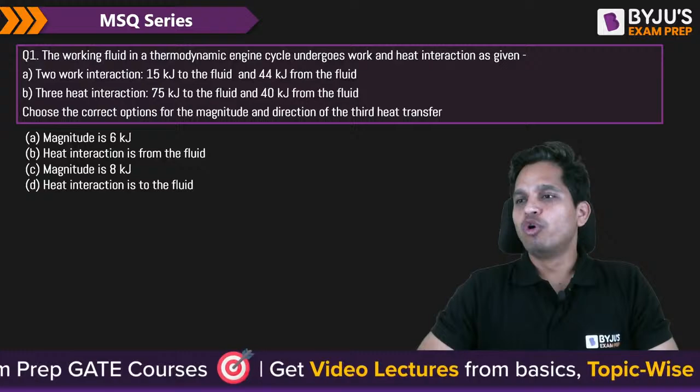So you have this cycle, and work and heat interaction is happening. So two work interactions: one is work input is equal to 15 kilojoule, and work output is 44. It is zoom only, right? It is the highest width. Maybe you can zoom it in your mobile or something, but it is in the whole PPT.

Now they are saying 3 heat interactions are happening, 2 are given. So first heat interaction, Q in, is equal to 75, and second, Q out, is equal to 40 kilojoule. Third one I don't know, I need to find out. So that is what I need to find out: magnitude and direction of heat interaction, Q3.

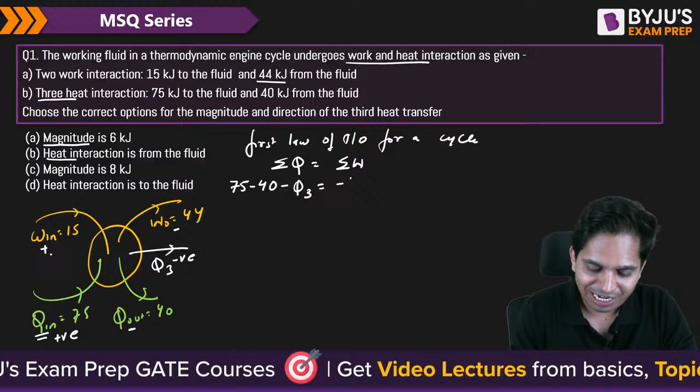Yes, it is from the fluid, Ashwin, you were wrong, okay. Chalo, let's see how it is getting. So Q in is positive, Q out is negative, this is also out, this will also be negative. Work in is positive, this will be negative. So it is 75 minus 40 minus Q3 is equal to... my work input is negative, I am sorry, input is negative, this is positive, so minus 15 plus 44. So Q3 is equal to 75 minus 40 plus 15 minus 44. So now how much are you getting? How much will you get?

75 minus 40 plus 15 minus 44, so you are getting plus 6 kilojoule. Now here what does plus mean? Plus does not mean that it is transferred to fluid. What does it mean? It means that you have assumed the correct dimension. Because already minus we have given here, already minus we have put here. So now if it is coming positive, we have already considered a direction. So if we are getting positive, it means that we have considered the right direction. So that is correct. Magnitude is 6 and from the fluid.

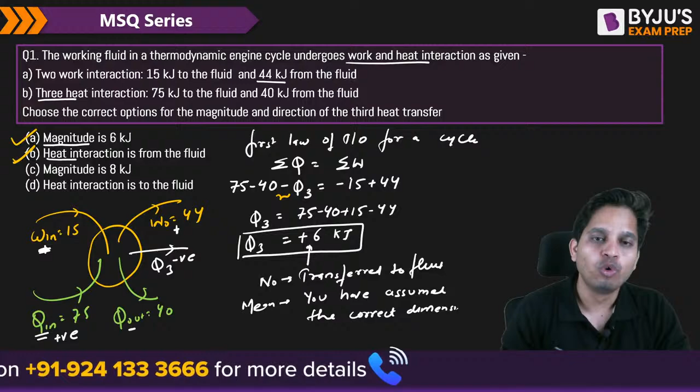Okay, chalo. Next question, quickly. Very simple question.

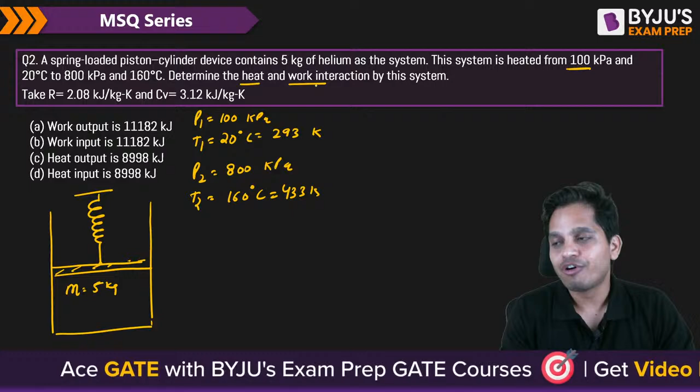I think you have already seen this question. A spring-loaded piston cylinder device contains 5 kg of helium. So we have this cylinder, which has piston, and a spring is attached. It contains 5 kg of helium. Now the system is heated from this pressure. So P1 is equals to how much? 100 kilopascal, P1 is 100 kilopascal and T1 is 20 degrees Celsius, which means 293 Kelvin. And then P2 is equals to 800 kilopascal and T2 is equals to 160 degrees Celsius. So 160 is how much? 160 is 433 Kelvin. Determine the heat and work interaction. Both we need to find out, heat and work. Yes? Ashwin, are you solving this?

Now you see, if I draw PV diagram, I need volume as well. Okay, what I can do, I can find out volume from here. V1 is equals to mRT1 upon P1. So M is known, R is known. It is what? It is helium. So R is given, T1 is given, P1 is given. Okay, so 2 into 2.08 into 293 by 100. How much is volume? How much is volume? V1. Quickly, how much is V1, guys?

V2 also you can calculate. M R T2 by P2, that is 433 upon 800. How much is V1 and V2? Quickly, how much is P1 and V1 and V2? Come on, quickly. V1 is? Are you solving this or not? Yes or no? I mean, if you are solving it, then I should stop. Otherwise, I will write the answer. So V1 you are going to get how much? 30.47 meter cube and this is

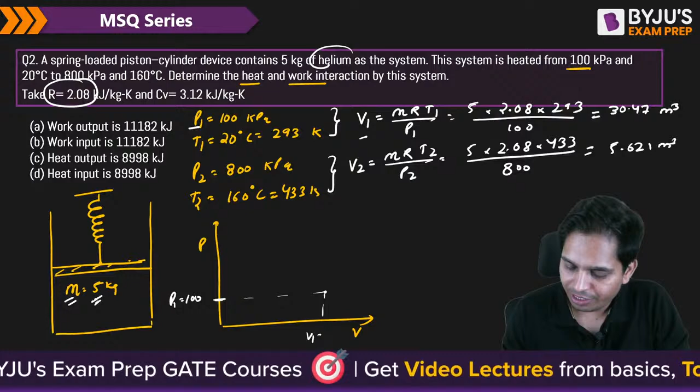Chalo. Now what do we know? Look, P1 we know, V1 we know. So I can mark P1 100 and V1 30. P1 is equals to 100, V1 is equals to 30.5 meter cube. Also I can write P2 is equals to 800 and this is 5.

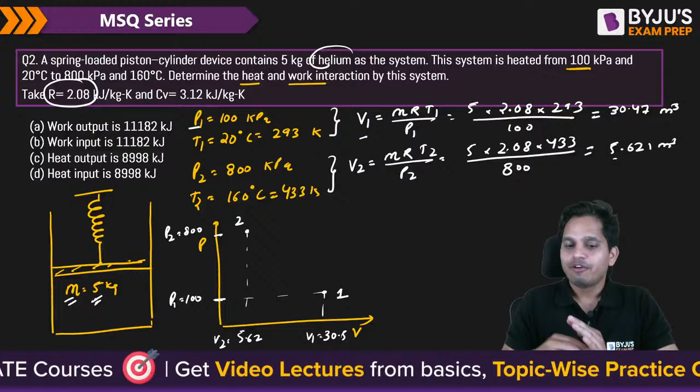Now you see, I know point 1, I know point 2, and if I know the process, I know that area under the curve gives us work transfer. So what kind of process will be there? Quickly guys, what kind of process? It is when there is spring, there is always linear relationship. No, it is piston cylinder, right? It is not open. It is closed. But what kind of process is happening? Whenever you see, because it will only allow to go up very slowly. So it is a linear relationship.

So basically, spring is, whenever spring is there, you can draw this diagram between 1 and 2. Okay, so you are going like this. So if this is my curve, why am I drawing this curve? Because of spring, linear relationship between pressure and volume. So pressure is equals to AV plus B. Some kind of relationship is there. Okay, why this linear? Because of spring.

Okay, so now I have drawn this process and I know that area under this curve will give me work interaction. This is work transfer, dW. So now you can calculate dW for this area, for this whole area, is how much? Half P1 plus P2 into V2 minus V1. So half, or basically final minus initial, okay. Final is 2, initial is 1. Now P1 is 100, P2 is 800. So total is 900. Now V2 was 5.6 something and this is 30 point something. This is 5.6 to 30.47. So tell me how much work you are getting. How much work you are getting?

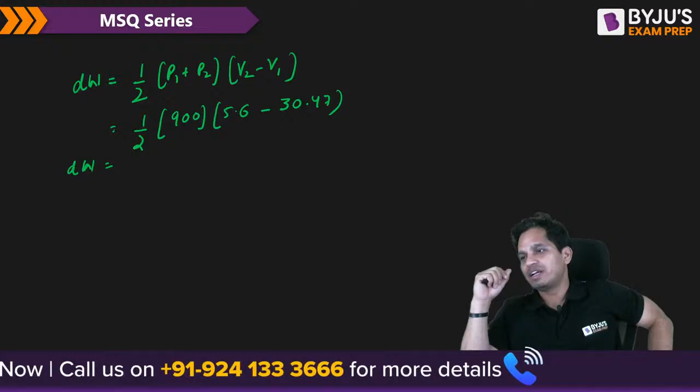Sadi Carnot, I am not the right person to answer this. Okay, soil mechanics is, I think, civil subject, right? So it's better if you ask a civil faculty, he will be able to advise you better. If you want answer, you can ask something from mechanical engineering branches. I can answer that, okay. But as I can see, that is civil engineering, right? Soil mechanics is from civil, isn't it?

Chalo. dW you have gotten 112. How do you get this? You will get minus 11182. 11182 basically.

Kilojoule. Are you getting this? Are you also getting this or not?

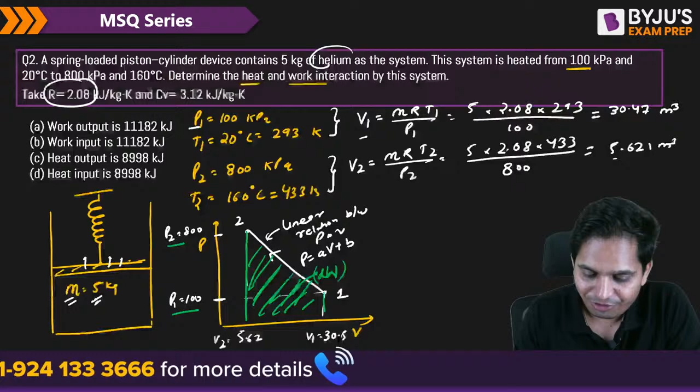Now they are asking calculate heat transfer as well. So dQ for a closed system equals du plus dW, and du is M CV T2 minus T1 minus 11182. Mass is 5, CV is given as 3.12. T2 is how much? T2 is 433, T1 is 293. So 433 minus 293 minus this. How much are you getting?

Now what is the heat transfer? Minus 8998 kilojoule.

So you are giving it is work input and this is heat out. Heat out, heat out. Okay? Clear? Good? Did you get it?

Guys, come on, whoever is there, try to solve it with me, because when will you solve? Tell me, when will you get extra time to solve it? Nowhere. If you're just sitting down and watching this lecture, then you are doing a mistake. You are anyway giving that much time, right? So solve before me, give the answer. If you are hesitating, writing your answer in the comment, online is the best way to come out. So for example, if there is a physical class, maybe sometimes you feel embarrassed, I have done wrong, maybe I have done wrong, I should not answer. But what is the hesitation in answering here? You can directly answer in the comment box. Nobody knows you. You are just growing yourself by solving questions, and by writing it, you have a sense of satisfaction inside. Trust me, when you answer it, you have a sense of satisfaction inside. Okay, chalo. So yes, that is correct, that is correct.

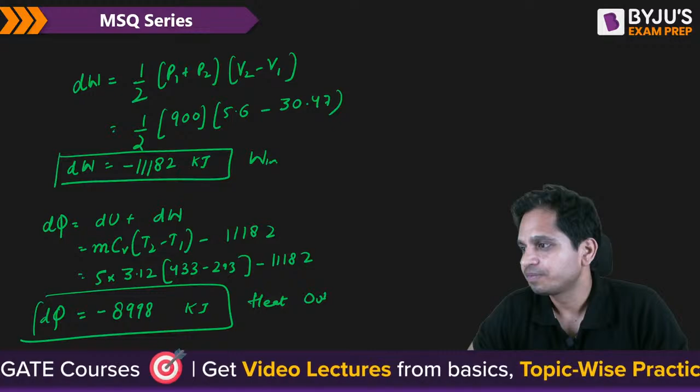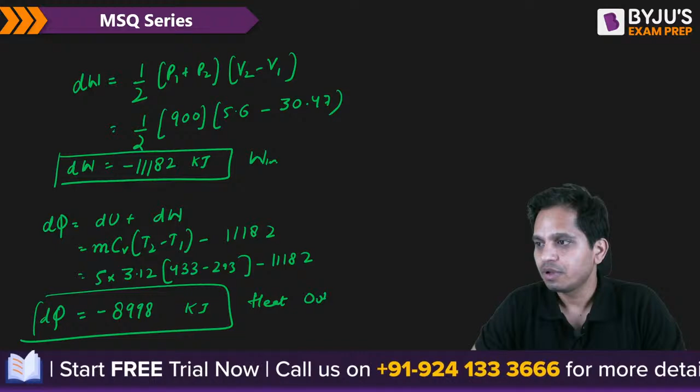Solid mechanics. Okay, solid mechanics you said. I read it, soil mechanics. Okay, so MS in solid mechanics or applied mechanics. Applied mechanics is also Madras. So what you can do, I'll tell you the best thing. If you are in the Telegram group which I shared in the beginning, you can connect with me. You can directly text me, and I will connect you with one person who is in IIT Madras. He knows much better about placements, he knows much better about the actual status of the branches. So I think applied mechanics is better in MS. He is in aerospace basically, but he knows better, because when I was in IIT Kharagpur, I knew what are the placements of other branches as well. And he has done BTech in mechanical, so he knows about these things. He can give you a better idea, but I think applied mechanics is better. But in terms of placement, I am not very sure. That is my perception. Okay, chalo.

Let's move on to the third question. Again, very easy question, guys. Quickly, what do I need to find out? Net work transfer for the cycle and net heat transfer for process 1 to 2. I have to check which options are correct. So basically, I have a cycle in which 3 processes are happening.

Pressure, volume. Process 1 to 2 is constant pressure. So 1 to 2 is constant pressure, P1 equals P2 equals 1.4 bar, and V1 is given as 0.028. I don't know V2, but what I know is work output is happening, 10.5 kilojoule.

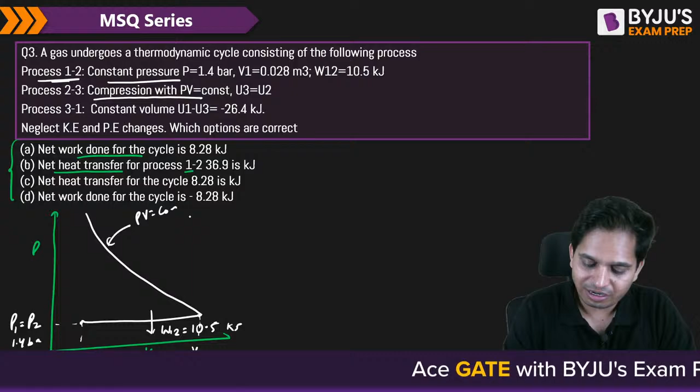Then 3 to 1 is constant volume, that means V1 equals V3. And they are saying that here U1 minus U3 is equals to minus 26.4 kilojoule. This is given. So what can you do? Now let us take

process 1 to 2. Now they have given work transfer equals 10.5, work 1 to 2 is equals to 10.5 kilojoule. And what is the work in constant pressure process? How do you calculate work in constant pressure process, guys? What is the formula to calculate constant pressure process work transfer?

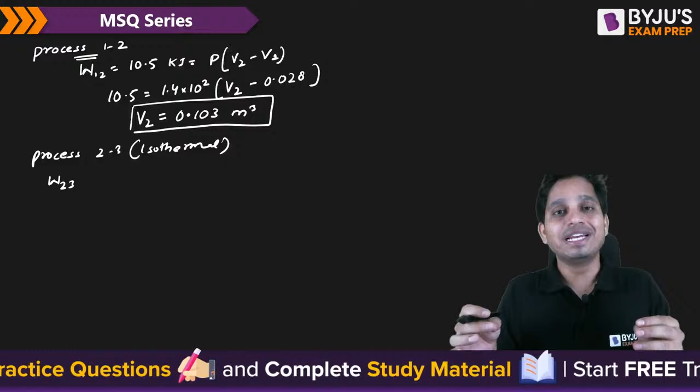Okay, so how do you calculate work? Guys, really look, if you are not writing, that is also okay. But if you do not remember these formulas, then it is time that you revise your formulas. I am telling you seriously, 6 months are left for GATE. You need to revise your formulas. It is very important, and you should have a revision cycle. You do not just revise today and forget it for 2 months. There must be a revision cycle. So if you are learning a concept today, revise it in 1 or 2 days, then revise it within a week, then revise it within a month. So you need to have a revision cycle.

Okay, so what is work transfer in isothermal? By P2V2 minus P3V3 upon... no, that is not for isothermal. I am really sorry, this is polytropic. So this is P2 V2 ln of V2 by... no, V3 by V2. Now you know V3, yes you know V3, you know V2 also. And you know P2V2 as well. So you know P2V2, you know V3 and V2. You can directly put it, yes, you can directly put it.

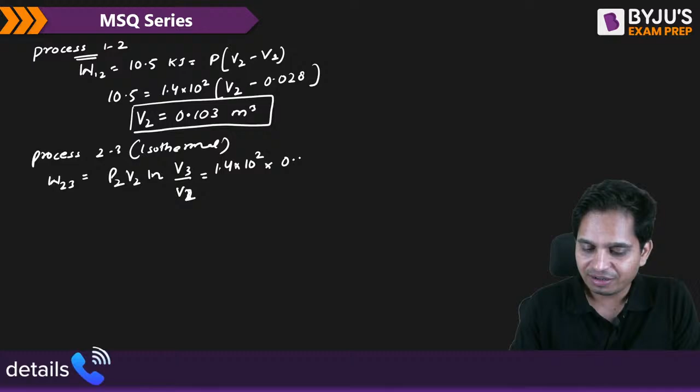Quickly guys, P2 is how much? P1 equals P2, so it is 1.4 into 10 to the power 2. V2 is how much? We have just calculated. ln V3 equals V1, 0.028. This is 0.103. How much are you getting for 2 to 3 work transfer? How much work transfer are you getting? Come on.

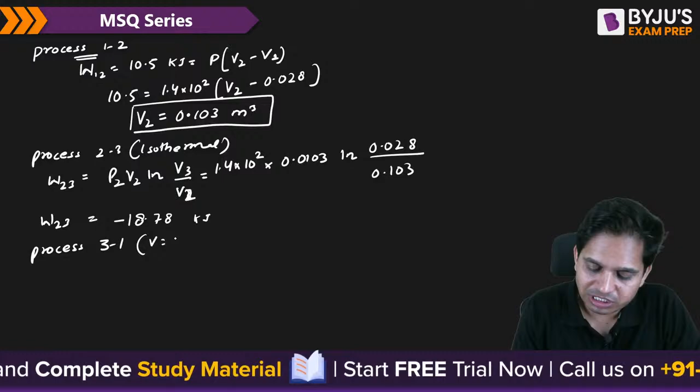Okay, chalo, so now next is process 3 to 1, which is constant volume. And what is the work for constant volume, guys? You should know this, this is the must know thing if you are studying thermodynamics.

Work 3 to 1 is equals to how much? Constant volume work, constant volume work, constant volume work. Na baba, na Siraj, that is open system work. Closed system work is always PdV. Now because volume is constant, so dV is 0. So constant volume work is 0. This is the most basic thing we should know. Yes, PdV is there, but it is 0 because change in volume will be 0. Volume is constant, change in volume is 0.

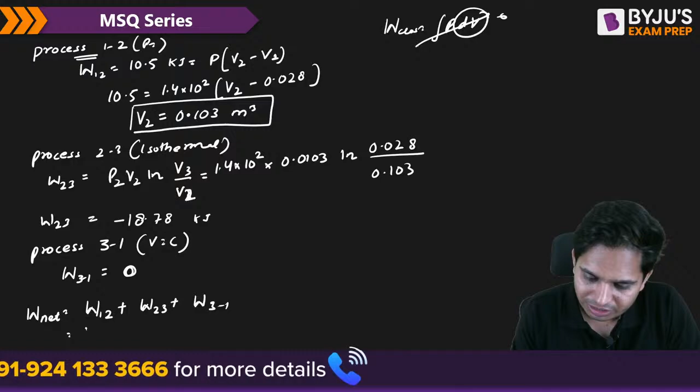Okay, so what is the net work? W12 plus W23 plus W31. So this is 10.5 minus 18.78 plus 0. How much is net work? Net work is minus 8.28 kilojoule. This is net work.

So let's see what the options are asking. Net work for the cycle is this. Is it correct? Is it correct? Or D is correct? Which one is correct? A or D, which one is correct? D is correct. Yeah, I mean approximately minus 7 is also okay, approximately 8 point something you are getting. Okay.

Now what about heat transfer? Heat transfer I need to find out.

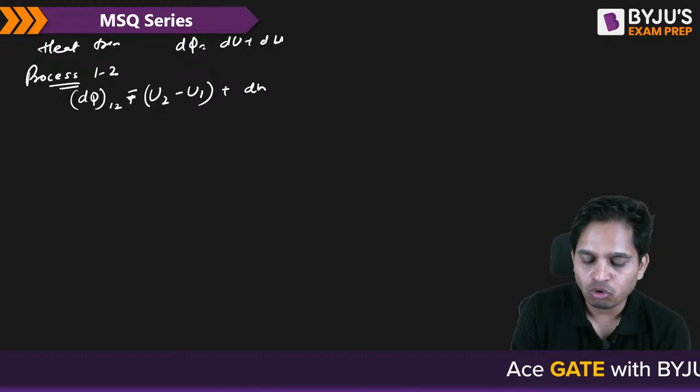So when I talk about heat transfer, I will use dQ equals dU plus dW. Yes, D is correct. So when I say process 1 to 2, that means dQ 1-2 is equals to u2 minus u1 plus dW 1-2.

Now how do I calculate u2 minus u1? They have given u1 minus u3 is this, and this is also given: u3 equals u2. So can I write u1 minus u2 equals this? Can I write u2 minus u1 equals 26.4 kilojoule? Yes, I can write that.

So dQ for 1 to 2 equals 26.4, and work is already given. This is work, 26.4 plus 10.5. So dQ of 1 to 2 equals around 37, around 36.9 kilojoule.

What about process 2 to 3? Again dQ 2-3 equals u3 minus u2 plus dW 2-3. Now u3 equals u2, it's an isothermal process. So yes, that is correct. 36.9 is correct. That means this is 0.

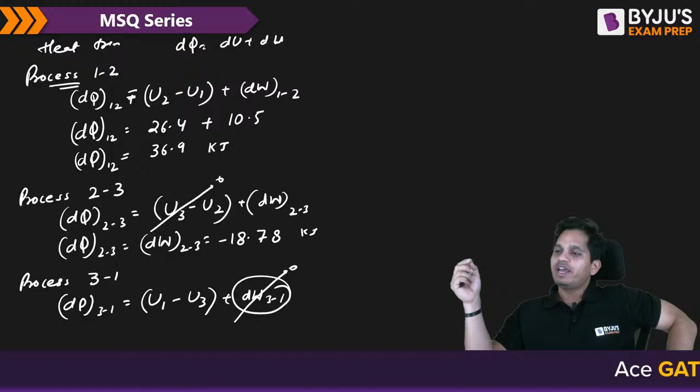Always give me a short name, I can't say the whole name again and again. But always write with sign, because you need to have this habit of writing sign. Otherwise, most of the time you will get your question answer wrong even if you solved it correctly, but while marking you will mark it wrong.

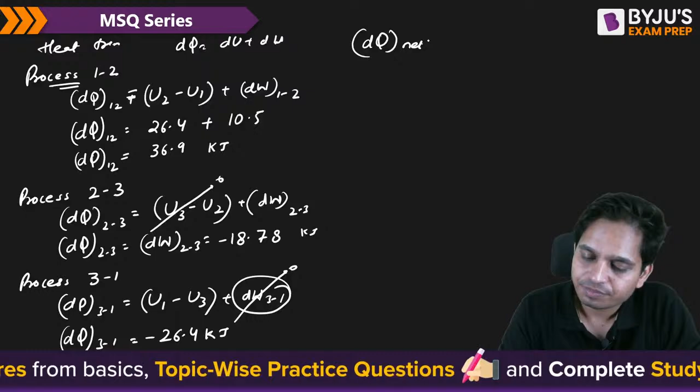So dQ 3 to 1 equals u1 minus u3. So what is u1 minus u3? This is minus 26.4 kilojoule. So what is dQ net? dQ 1-2 plus dQ 2-3 plus dQ 3-1: 36.9 minus 18.78 minus 26.4. How much is it? Minus 8.28 kilojoule, Q net.

Okay, so let's see the options. Tell me which options are correct. D is correct, I know. A is wrong, I know. What about B and C? Which one is correct, B or C, or both? It is multiple select, more than one option can be correct.

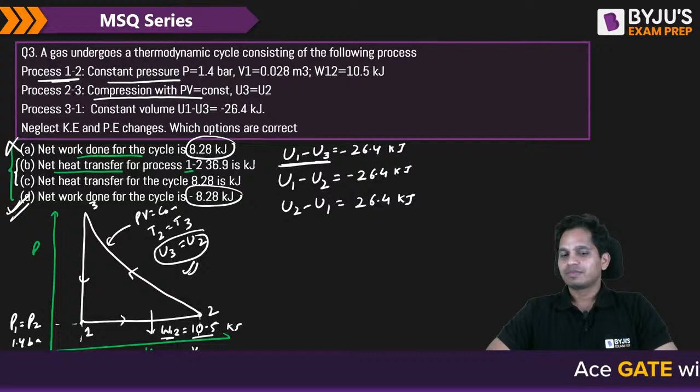Give me the option, which option is correct? C is correct, and you have got your question wrong. Net heat transfer, where is the minus? In the option, have they given you minus? Carefully see the question, carefully see the option. C is not correct, B is correct.

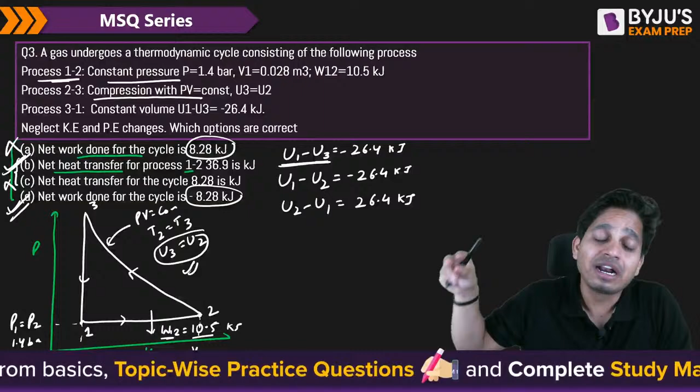Next question. A piston cylinder device initially contains M1 equals 0.6 kg of air with volume 0.1 meter cube.

Don't be scared. Whatever fear you have, however scared you are, you need to get up in the morning. You need to plan your next day at night, get up in the morning and follow that plan. Solve questions, keep going. If you are scared, it's okay, everyone is scared. But if you stop, then your fear will become your reality. So you do not have to stop. Maybe you will not get successful, maybe you will not get a good rank, but I guarantee you one thing: if you stop today, then for sure you will not get a good rank. If you keep going, there is a possibility maybe you will get a good rank, but if you stop, there is not a chance.

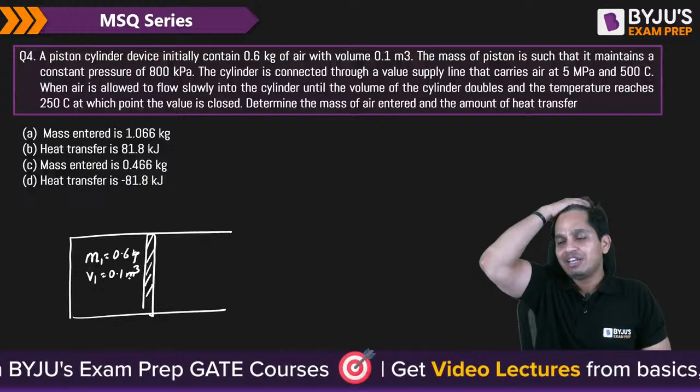This is an unusual request I have gotten, I have never gotten this request because the same proportion is there every time. But I don't know, maybe you are seeing it on a mobile screen or something. I think it's the same thing I always use, but I will see what we can do about this.

Anyway, so breathe. You don't have to stop. You have to promise that to yourself. Never stop.

Because anyway, even if you give everything for 5-6 months but don't achieve anything, you will not lose anything. I know in the next 5 months you are not going to achieve anything big anyway. But if you give these 5 months, maybe there is a 1% chance you will be able to do something. If you stop today, whatever you want to do after stopping, you can do after February as well. But right now, do not.

Whatever fear is there, fear is normal, but don't let that fear stop you. Get up in the morning, go ahead with your preparation. That is all you have to do, motivate yourself every day. Motivation comes, it's not natural, you have to motivate yourself. Whoever says it comes naturally, I would not say they are wrong, but it is not true entirely. Okay, chalo.

The mass of piston is such that it maintains constant pressure. Pressure P1 is equals to P2 is equals to 800 kilopascal.

Now the system is connected to a valve, where supply is P in equals to 5. This is the unsteady flow question. Ti is equals to 500 degrees Celsius. Volume of the air doubles when air flows in, volume becomes V2, so it expands and volume becomes 0.2 meter cube, and temperature T2 reaches 250 degrees Celsius. I need to find out the mass of the air entered.

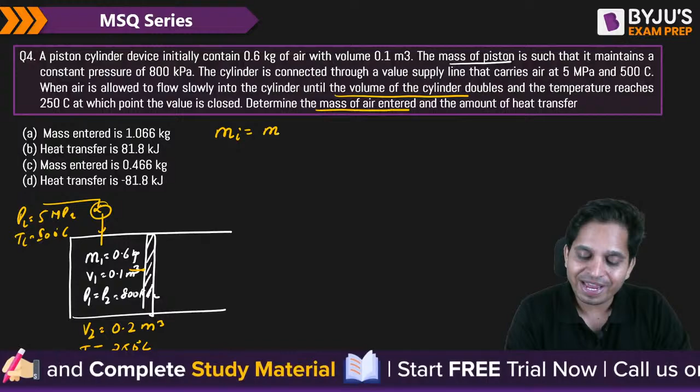So mass of the air entered will be equal to final mass minus initial mass, M1. M1 I know. Am I able to find out M2? So M2 will be equal to...

P2V2 upon RT2. So P2 is how much? Same, 800. V2 is how much? 0.2. R is 0.285. T2 is 250 plus 273, which is 523. How much is M2? Tell me.

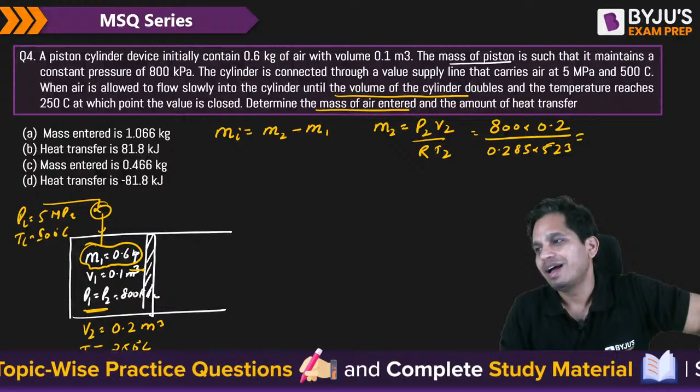So this is just 6 months hard work, beta. I mean, you can live your life whenever you want, but this hard work is always hard. That is why it is called hard work. It is only for 6 months. Adjust, do whatever you can.

So what is M2? M2 is how much? 1.066 kg. So Mi is equals to 1.066 minus 0.6. M1 is 0.6, so that much mass has entered.

So how much is it? It is 0.466 kg, so mass entered is this. What about heat transfer? Not just 1.066 — always try to write your answer till 2 decimal places, at least 2 decimal places.

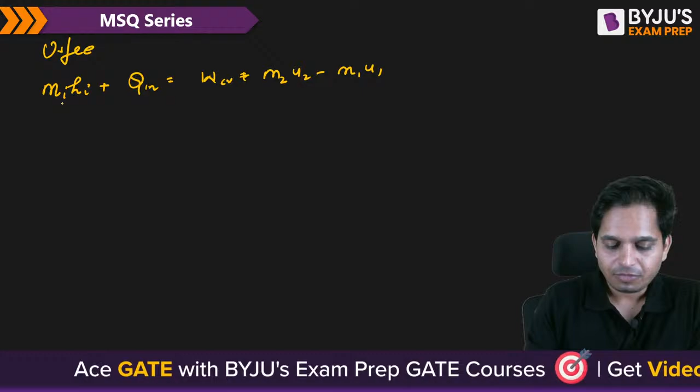Yes, now I need to find out heat transfer as well. So for that I can use the unsteady flow energy equation: Mi Hi plus Q in is equals to control volume work plus M2U2 minus M1U1. What is Mi? M inlet is 0.46 into Cp.

1.005 into Ti. So Ti is how much? It is 500 degrees Celsius. 500 means what? 773, right? So 773 plus this I need to calculate.

Control volume work means constant pressure work. Pressure remains constant, so P into (V2 minus V1). Pressure is how much? 800. It is 0.2, 0.1. M2 is, just now we have calculated, 1.066, 0.718, and T2 is 523, minus this is 0.6.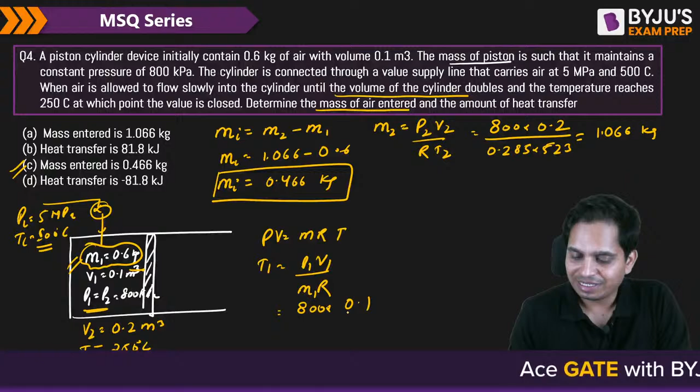0.718. What about T2? What about T1? Sorry, T1. I don't know T1, I can find out. How? By PV equals MRT, so T1 is equals to P1V1 upon M1R. P1 is 800, V1 is this, M1 is 0.6, R is 0.285. What is T1? T1 is 464.5.

So you can put it here, 464.5. So the only unknown is this Q in. You can find out how much Q in you are getting.

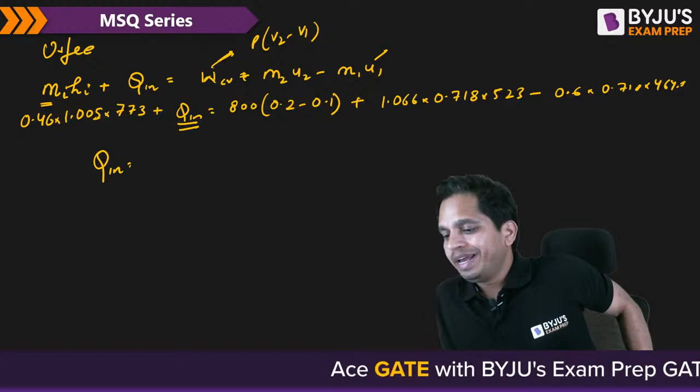Q in. Come on guys, how much Q in? No, Preet, what is that? 0.5455, no, Q in is not that. That is Mi, that is Mi, that is true. Okay, so write what you are answering. So what is Q in? Are you calculating, guys? Tell me quickly, what is Q in.

Did you calculate? So Q in is... come on Mani, Preet, come on guys, whatever is there, be a part of the class, okay, be a part of the class, come on.

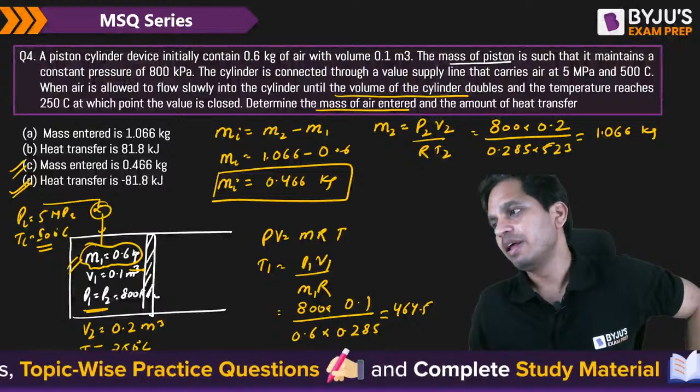It is minus 81.8 kilojoule. That means heat is rejected. Heat is rejected. So mass transfer is minus, heat transfer is minus 81.8. Minus 81.8. Yeah, 80.8 is also correct.

Okay, 81.8 is the correct answer. Basically, maybe some calculation mistake you have done, but you are very close. You are very close, okay. Let's move on to the next question.

A Carnot heat pump working between 5 degrees Celsius. So 5 is how much? 278 Kelvin, and 60, so 60 is I think 433. And it is driven by a Carnot heat engine. So it is driven by a Carnot heat engine.

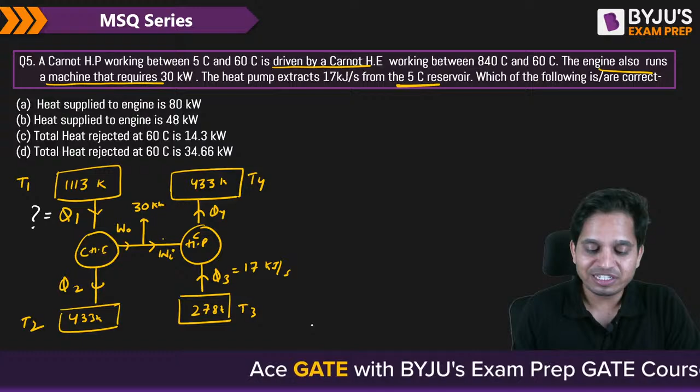Total heat rejected. So at 60, this is also 60, this is also 60. So I need to find out Q2 plus Q4. These are the two things I need to find out. Yes? These are the two things I need to find out. Okay, so how can we start?

You see, both of these are Carnot. So what I can do is: efficiency of reversible heat engine equals 1 minus T2 by T1, equals work maximum by Q1. Okay, let me say work output here. Work output. So this is 1 minus 433 upon 1113 equals work output upon Q1.

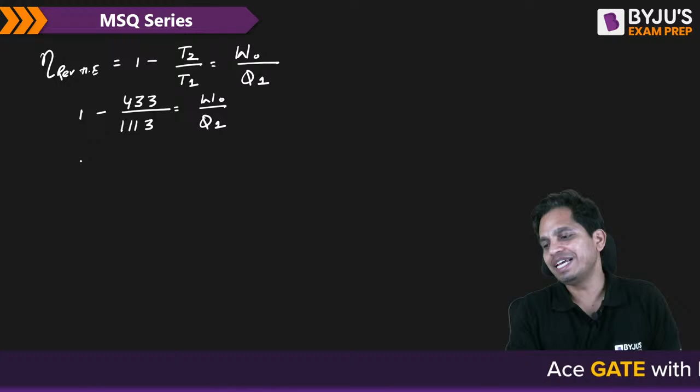So how much is efficiency? It is 0.7... no, I think, okay my mistake, this is 333. Okay, so this will be 333. So this is 0.7 equals work output by Q1.

So work output equals 0.7 Q1. Okay, because both are unknown, now I can't move forward, so I need to do something else. What can I do? I can go to this. Okay, yes.

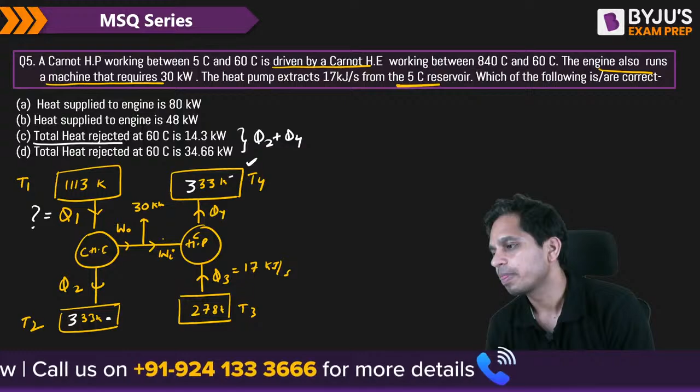So COP of reversible heat pump equals T higher, or T4 let us say, T4 upon T4 minus T3, equals Q4 by work input. Yes. Now what is Q4? So you can say by this energy balance that Q3 equals Q4 plus W in. So Q4 equals Q3 minus W in.

So I can write T4 is 333, by 333 minus 278, equals Q3 minus Wi by Wi. Now how much is Q3? Q3 is 17. Yes? 17 is given, yes?

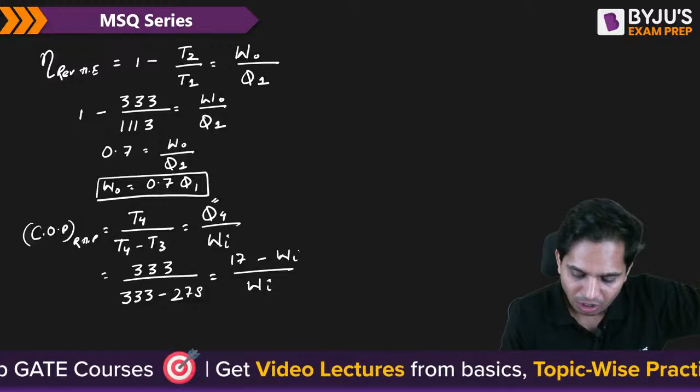So now the only unknown will be Wi, so you can calculate Wi from here. How much is Wi? What is Wi? Wi is this, okay, so how much is Wi? Wi is 3.36 kilojoule, right? Now from here I know that W out equals 30 plus W in.

W in I have just calculated, 3.36. So W output equals 33.36 kilojoule. Okay, 33.36. So now I know W output, I can put W output here, and I can calculate Q1 equals 33.36 by 0.7, and Q1 you will get 47.66 kilowatt. Yes, 33 is correct.

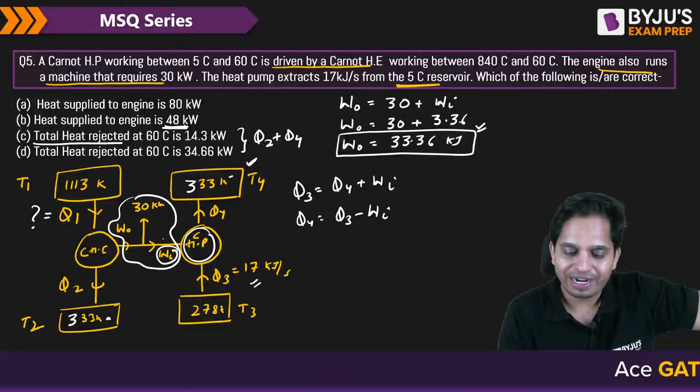Very good. So the first thing they were asking, Q1, so heat supplied is around 48, around 48. Yes, we got 47.66, that means B is correct. B is correct. Now total heat, that means Q2 and Q4 I need to calculate.

Q2 and Q4 I need to calculate. So Q4, I can calculate here itself by Q4 equals 17 minus 3.36 by this, which is W in, right? So Q4 equals how much? By 17 minus 3.36, it is 13.64 kilojoule. Yes?

What about Q2? By now I know this, Q1 equals 48. I know W output as well. So I can calculate, I know Q1 equals W output plus Q2. So Q2 equals Q1 minus W output. So 48 minus 33.36.

So Q2 is how much? 14.3 kilowatt. So now I can calculate Q2 plus Q4 equals 14.3 plus 13.64. The answer is 34.66 kilowatt. Yes?

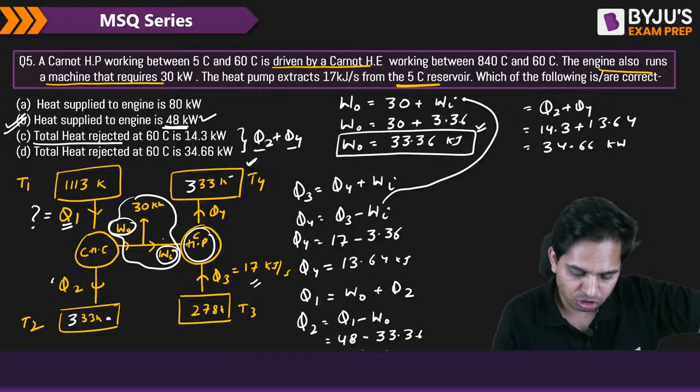Okay, Q4 is basically... one second, this was wrong. By energy balance, energy in will be equal to energy out. So Q4 is going out, it will be equal to Wi plus Q3. So the same thing you are going to write: 17 plus Wi. I am sorry, that was by fault.

So now work input is 3.36 plus Q3 is 17, so it will be 20.36. So this is 20 point...

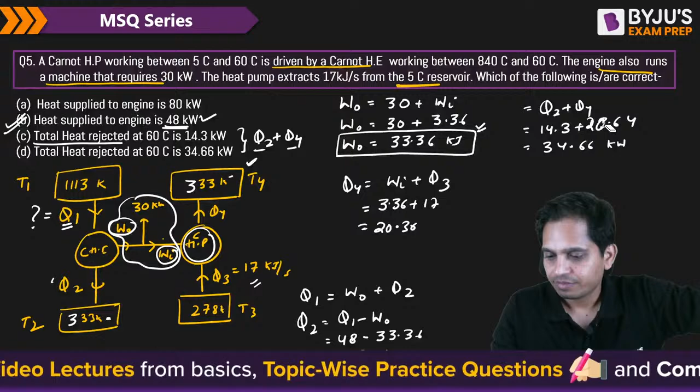20.36. Now you will get D. Okay, good.

Chalo, let's move on to the next question. Very simple question. A heat engine working between... so now I have a heat engine. These type of questions are frequently asked. It is working between 1000 Kelvin and 300 Kelvin.

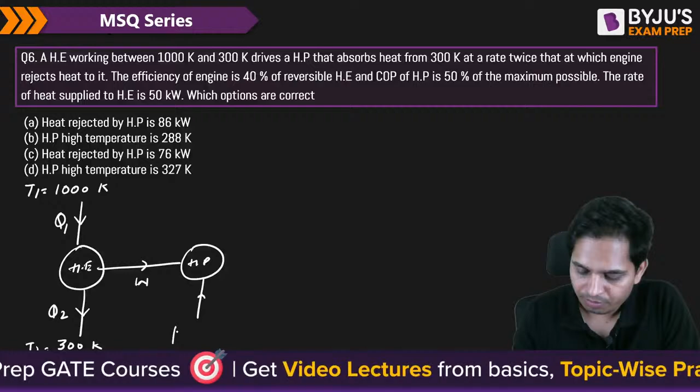Now it is driving a heat pump that absorbs heat from T3 equals to 300 Kelvin at the rate twice at which engine rejects heat to it. So Q3 is equals to 2 times Q2. The efficiency of engine is equals to 0.4 times reversible, and COP of heat pump is equals to 50% of reversible heat pump.

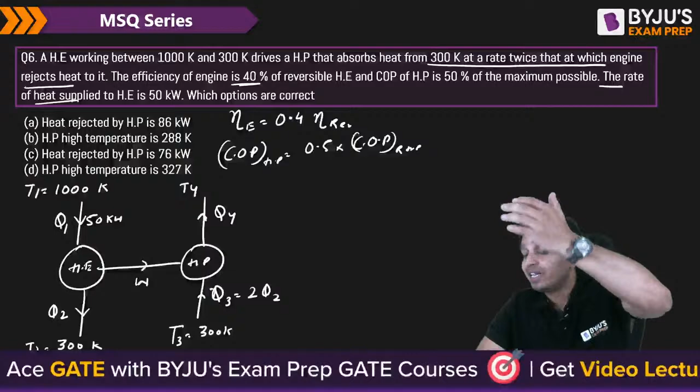The rate of heat supplied to heat engine is given as 50 kilowatt. So I need to find out T4 and heat rejected to heat pump, heat rejected by heat pump, and high temperature - both I need to find out. So T4 and Q4 I need to find out. It is based on the similar concept we did in the last question.

Will you be able to do it? It's very simple. Efficiency of engine is equals to 40% of reversible heat engine. So what is reversible heat engine efficiency? 1 minus T2 by T1. It is 0.4 into 1 minus 300 by 1000, so it is 0.7. 0.4 into 0.7. So your actual efficiency is how much? 0.28.

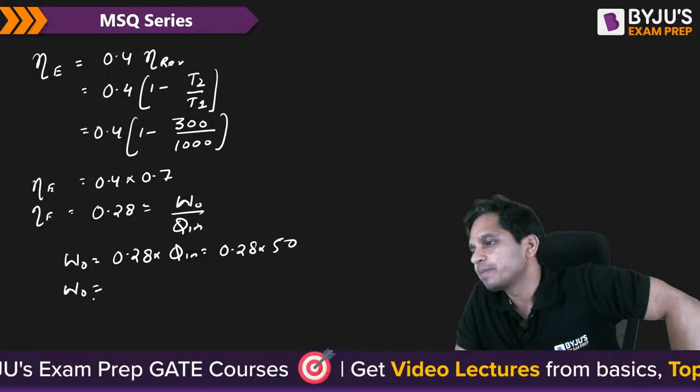Actual efficiency is also equal to work output upon Q in. So work output will be equal to 0.28 into Q in. So 0.28 into Q in is how much? 50 is given, right? So W output is how much? 14 kilowatt.

So now I know this as well, 14 kilowatt. So Q2 is how much? 50 minus 14, so it is 36 kilowatt. Now what is Q3? 2 times of 36, that means 72 kilowatt. Now what is Q4? See how simple is it? Q4 is 72 plus 14, that's 86 kilowatt. Any doubt in this? Simple energy balance.

Okay. Now the point is how to calculate T4. So T4 I can calculate by using this equation.

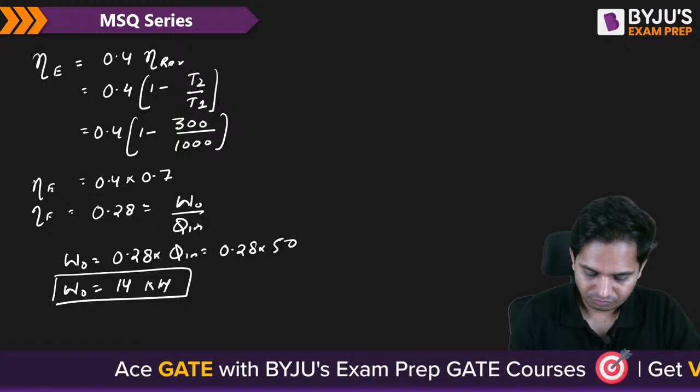COP of actual heat pump is equals to 50% of COP of maximum or reversible heat pump. So this is how much? This is Q4 by work equals to 0.5 into T4 by T4 minus T3. Now Q4 is 86, work is 14. So it is equals to 0.5 T4 by T4 minus T3. T3 also I know, T3 is 300.

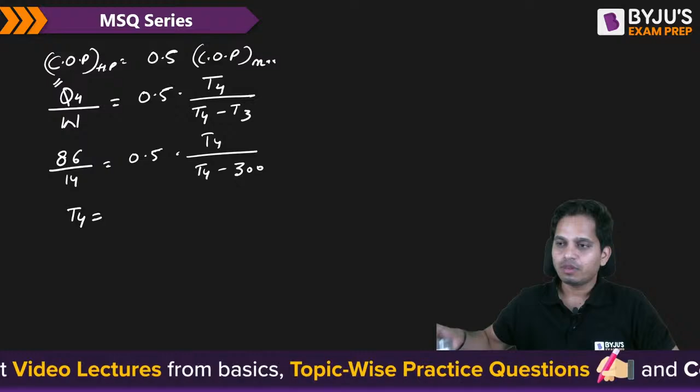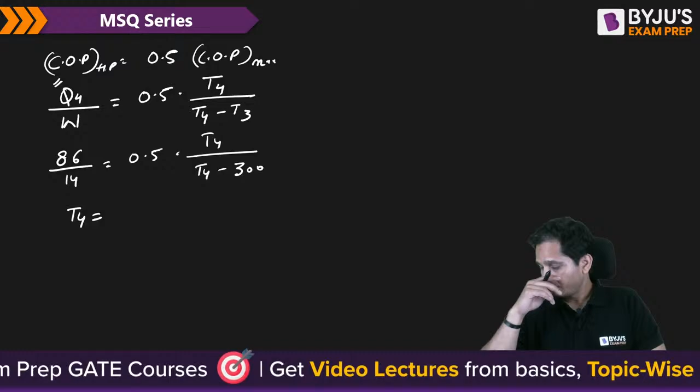So the only unknown is T4 here. How much is T4, guys? Quickly tell me. Are you guys solving it? If you are solving, then I will wait. I'll give you 30 more seconds and then I'll give you the answer. Please give me the answer in the comment box quickly.

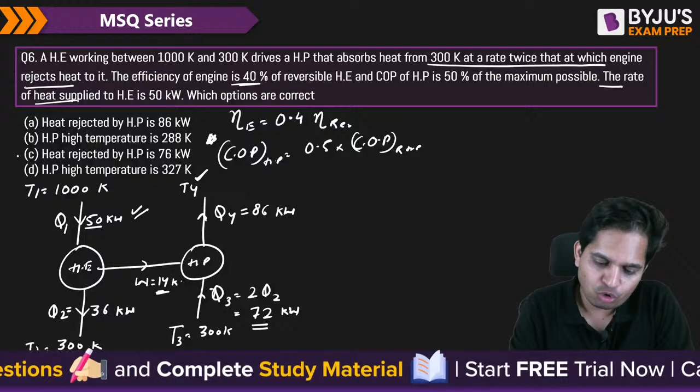So T4 that you will get is 326.5 Kelvin. Is it what everyone is getting? 327 is the correct answer and heat rejected is 86 kilowatt. Correct, correct, okay.

Chalo, let's move on to the next question. A reversible heat engine operating between T1 and T. So basically I have this engine, it is operating at T1 and intermediate temperature T. Now the energy that is rejected, Q2, from this engine is received by another engine. So same Q2 is given by another engine, engine 1, engine 2, at the same temperature, and it is rejected, let us say Q3, rejected at T2. Which options are correct?

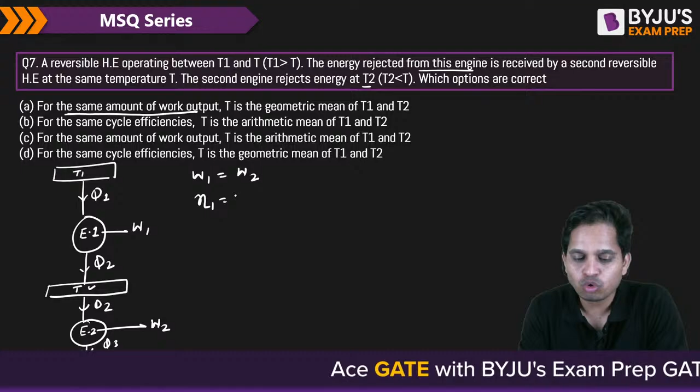So for this we have to keep the work: it is W1, it is W2. So if W1 is equals to W2, then what is the relation, what is T? And if efficiency 1 is equals to efficiency 2, same cycle efficiency, then what is T? In terms of T1 and T2, this we need to find out.

Okay chalo, so let us first take when efficiency 1 is equals to efficiency 2, and we know it is reversible heat engine, they have told us reversible heat engine. So for a reversible heat engine, I can say 1 minus lower temperature, that means T, over higher temperature, that means T1. What about efficiency 2? It is 1 minus lower temperature, that is T2, over higher temperature, that is T. So for this engine, this is the lower temperature and this is the higher temperature. For this second heat engine, this is lower temperature, this is higher temperature.

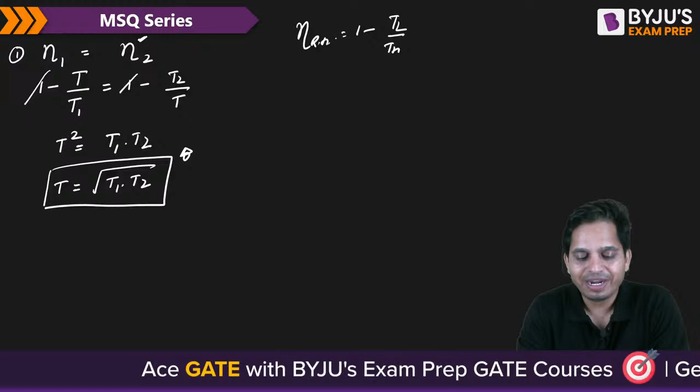The efficiency of a reversible heat engine is 1 minus T lower by T higher. So this and this cancel, giving T square equals T1 into T2. That means T equals under root of T1 into T2 — this is my intermediate temperature. So for the same cycle efficiency, is T the arithmetic mean? No, T is the geometric mean of T1 and T2. So D is correct.

What about work transfer, when the work is same? Let us see that as well. So when W1 equals W2, what is the efficiency? It's 1 minus T lower by T higher, which is also equal to work upon Q in. So from here, W can be said as Q1 times 1 minus T lower by T higher, and this is Q2 times 1 minus T2 by T.

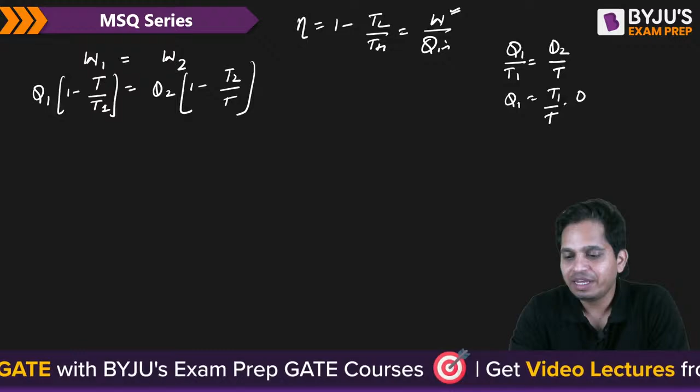Now also for reversible cycles I know that Q1 by T1 equals Q2 by T — we proved this for reversible engines, right? So for reversible cycles, Q1 equals T1 by T into Q2. Let me substitute it here: T1 by T, Q2, 1 minus T by T1 is equals to Q2. Are you guys able to understand this?

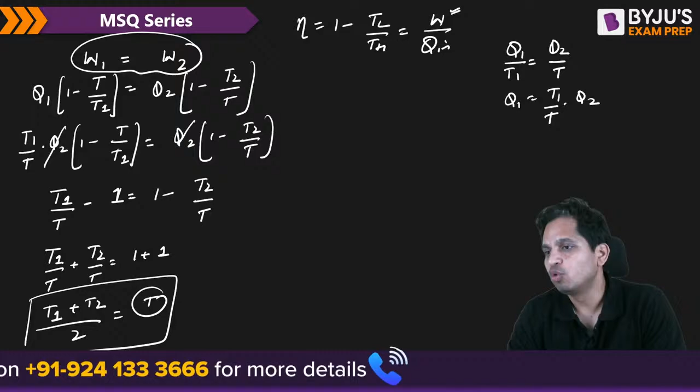It's very simple, and this will get cancelled. This one, T1 by T minus 1 equals 1 minus T2 by T. So what can I do? T1 by T plus T2 by T equals 1 plus 1. So T1 plus T2 by 2 equals T. So when work remains the same, the intermediate temperature is the arithmetic mean of T1 and T2.

So when work transfer is same, for the same amount of work transfer, is it geometric mean? No, it is arithmetic mean. For the same amount of work transfer, T is the arithmetic mean. So C and D are the correct answers. Clear? Yes?

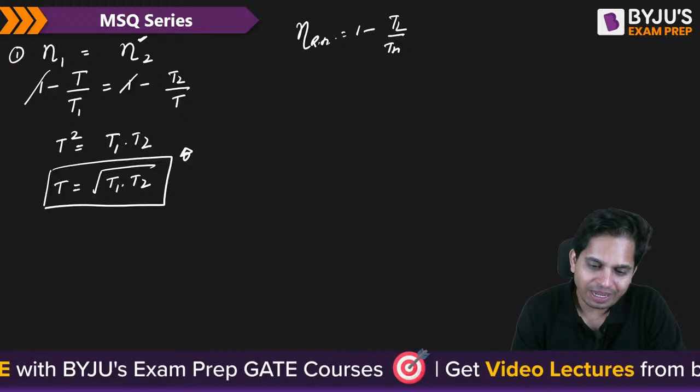Now a reversible engine draws 5 megajoule. So basically I have this engine, and it is a reversible heat engine. It draws 5 megajoule from, let us say, T1 equals 400 Kelvin, Q1 is equals to this. And it also does work output equals to 840 kilojoule.

Now it also involves heat interaction from 300 and 200 Kelvin. So basically there is one more thermal reservoir, let's say 300 Kelvin, and another reservoir T3 at 200 Kelvin. It is interacting heat with this as well. Let's say it is taking heat Q2 and rejecting heat Q3 from this. So now I need to tell what is the magnitude and direction of Q2 and Q3.

So the first thing I will do is energy balance, which is first law of thermodynamics for a cycle. What is that? Summation of Q equals summation of W. So let us say Q1 plus Q2 minus Q3 equals work output. Q1 is 5, Q2 I don't know, Q3 I don't know, this is 840, right? This is megajoule, this is megajoule, this is kilojoule, so I have to write 5000.

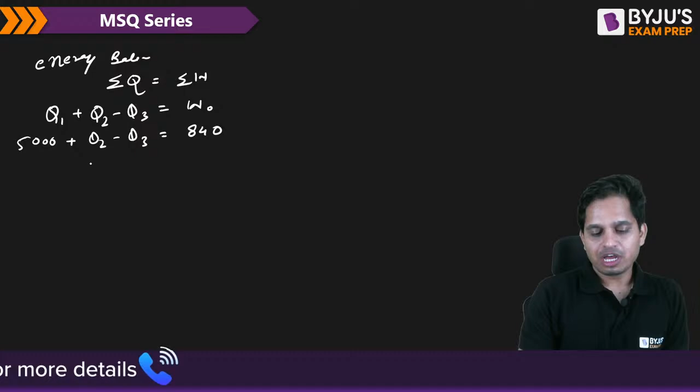So this is 5000. Q2 minus Q3 will be how much? It is minus 4160. Okay, so now I have one equation, two unknowns.

So now I will go to my entropy concept of Clausius inequality. For a reversible cycle, it equals 0. That means Q1 by T1 plus Q2 by T2 minus Q3 by T3 equals 0. So now I can find out Q2 — I can get one more equation. So what is that equation?

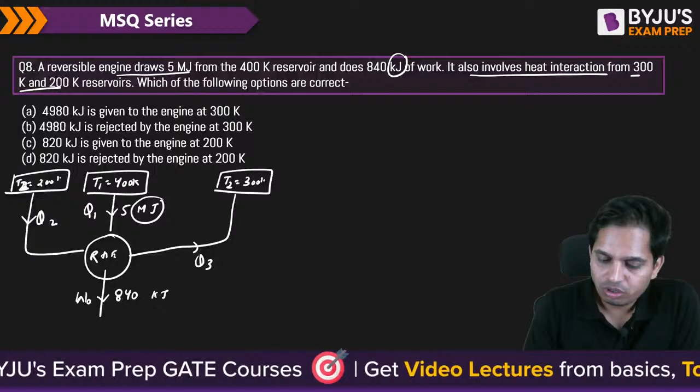Okay, this is what you will get, because you will get the denominator as... anyway, this is what you should get. 4Q2 minus 6Q3 is equals to minus 15,000. So now you have two equations, two unknowns.

So Q2 minus Q3 is equals to minus 4160. And 4Q2 minus 6Q3 is equals to minus 15,000. So now you can solve it.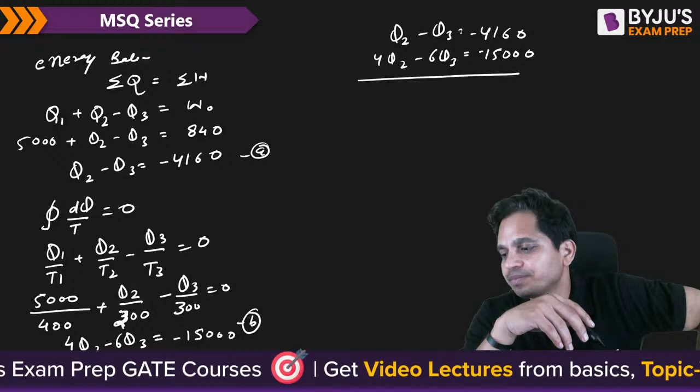Two equations, two unknowns. So now Q2, how much Q2 you are going to get? Let me multiply it by 4. I have solved it differently, that's why I am not sure about the answer.

4Q2 minus 4Q3 is equals to, I have to multiply this also by 4, and this is minus 16640. So now I can do minus plus plus. This will get cancelled. Minus 4Q3 plus 6Q3 is equals to minus 16640 plus 15,000, it is minus 1640.

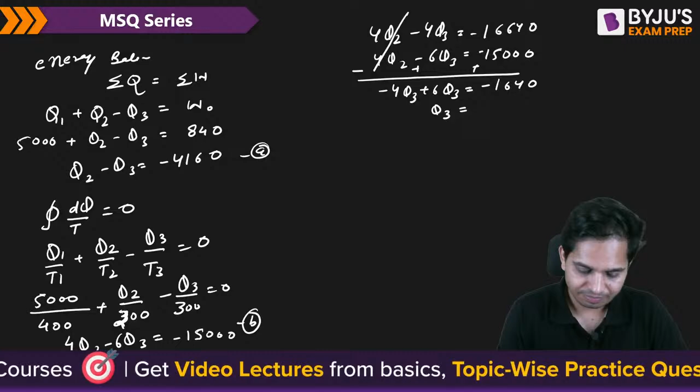So this is 2Q3 is equals to this, and you will get Q3 is equals to minus 820 kilojoule.

Okay, now I can write Q3 in this equation. So I will get Q2 plus 820 is equals to minus 4160, and Q2 is equals to minus 4980.

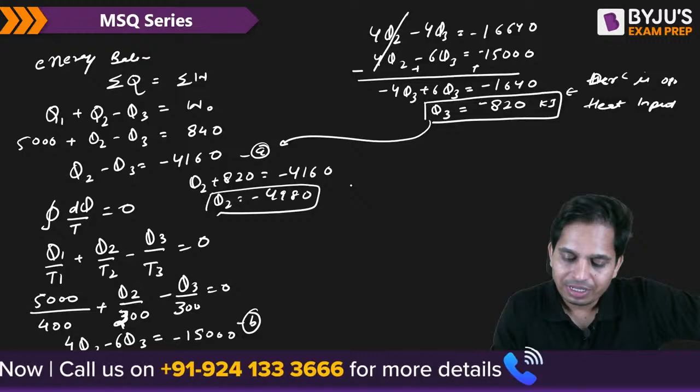So what is it saying? That the heat direction is opposite. Q3 we have taken going out, but it means it is heat input. This we have taken again, direction is opposite, so we have taken it going in, so that means it is heat output.

So Q2 is basically 200 Kelvin rejected. So this is true, and what is given is this. This is true, okay, clear?

Good evening, Sandy.

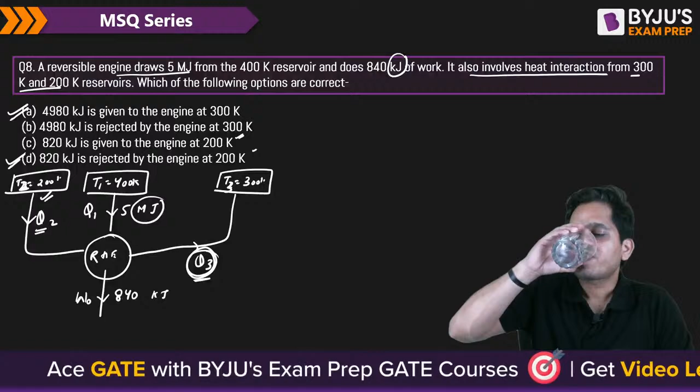Okay, so this is the right option. Let us move on to the second last question for today.

A resistor of 30 ohms, maintained at a constant temperature of 27 degrees Celsius, while a current passes through it. So resistance is 30 ohms, current is 10 ampere, temperature is kept at 27 degrees Celsius, and time is equals to 1 second. Which of the following options are correct?

Entropy change for the resistor and entropy change for the universe. So you have to understand, if resistor is your system, then if resistor is my system, is there any heat transfer involved with the system?

It should be dq by temperature of resistor. But is there any heat transfer involved with the resistor? No, only electrical work. This is electrical work, I square RT, which is the electrical work that is involved. That means 10 square into 30 into 1, 3000 joule electrical work is involved, no heat transfer.

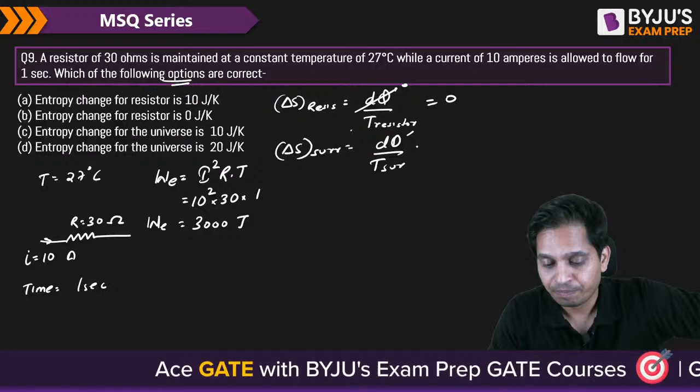So this is 3000 by 27, means 300. That means 10 kilojoule per Kelvin is for the surrounding. So what about universe?

Entropy change for resistor is 0. But what about universe? Entropy change of system plus entropy change of surrounding, that means 0 plus 10, so it is plus 10 kilojoule per Kelvin. So you have to always remember that entropy change for the universe is always positive. This is the increase in entropy principle.

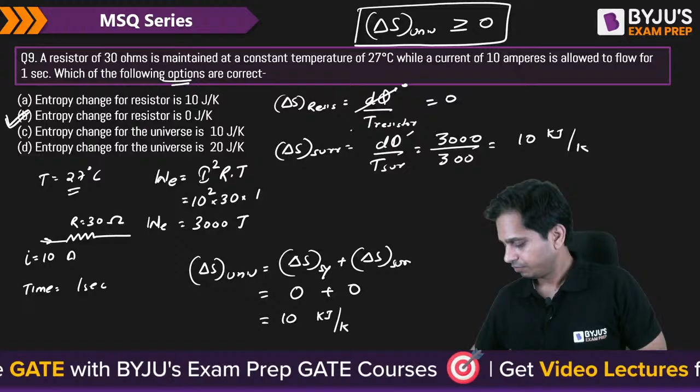Always greater than equal to 0. Always greater than equal to. Do you know this?

Let us come to the last question for today. Question number 10. All were good questions I have selected especially for you, because MSQ practice is very important. A lot of time I can see people are confused, 90% of the students remain confused. They do wrong in MSQ questions because the options are very tricky in MSQs. So you need to practice more and more MSQ questions.

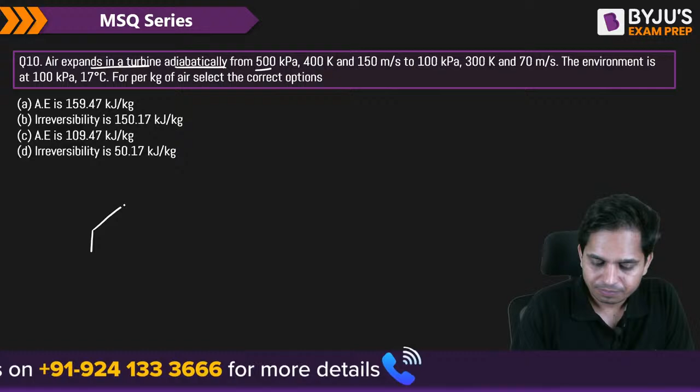Okay, now we have a turbine. Air expands in a turbine adiabatically. So what do we have? We have this turbine, it is entering from here, it is leaving from here. So when air is entering, the pressure P1 is equals to 500 kilopascal, temperature is 400 Kelvin, and velocity is 150 meter per second. Now when it is going out, pressure P2 is equals to 100 kilopascal.

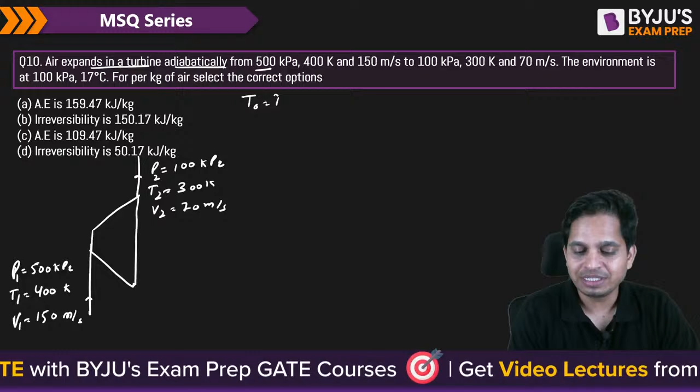T2 is equal to 300 Kelvin and V2 is equal to 70 meter per second. Surrounding environment is at 17 degrees Celsius, that means 290 Kelvin, and P naught is 100 kilopascal.

Now per kg of air, that means mass is equal to 1 kg, calculate available energy and irreversibility. I need to find out available energy and irreversibility. Do you know what we are going to do? So it is an open system, you see.

It is an open system. So available energy is equal to phi1 minus phi2. What is this? What is phi? H plus v square by 2 minus T naught S.

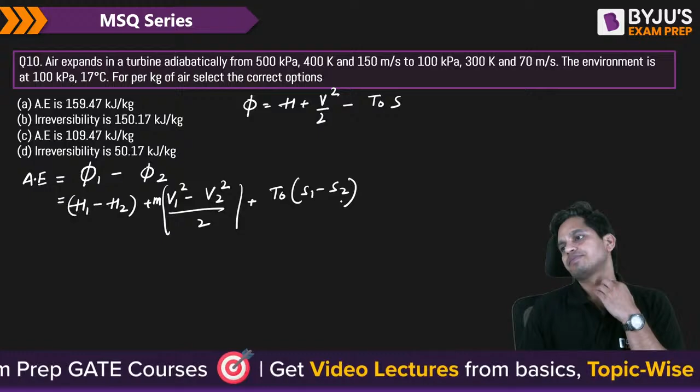So I can write H1 minus H2 plus V1 square minus V2 square by 2 multiplied by M plus T naught S1 minus S2. So I can write M Cp T1 minus T2 plus M V1 square minus V2 square by 2 plus T naught, or M T naught Cp ln T1 by T2 minus R ln P1 by P2.

Now mass is 1, they have given mass is 1. So what can I do? 1.005, this is my T1, this is my T2. So T1 minus T2 is 100, plus mass is 1. This is my V1, this is my V2. So 150 square minus 70 square by 2000, because everything I am taking in kilojoule.

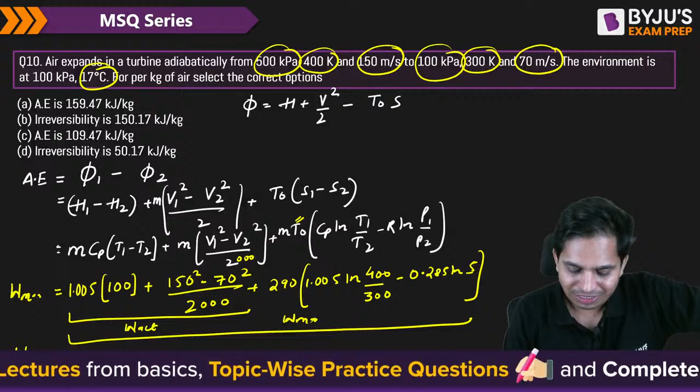So your maximum work is equal to how much? How much are you getting? Are you solving this? So this is 109.3. Okay, one second. I have written it correctly here, but here I did a mistake. It is minus here, okay, it is minus. So minus, minus and minus.

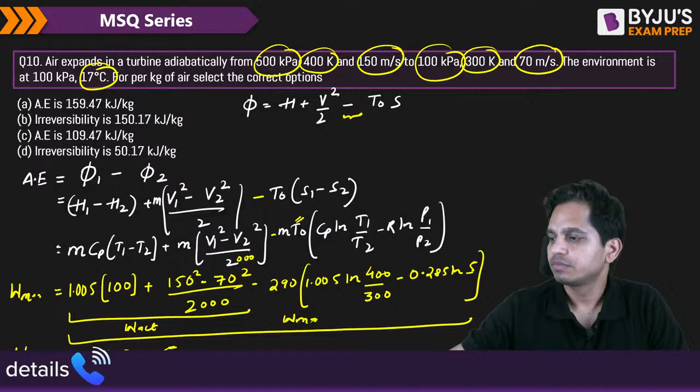How much are you getting? Quickly take 1 minute and solve this, tell me the value. So this whole thing, are you solving this? What is that you are getting? So the overall thing, you are going to get minus, you will get 159.47, and this quantity actually is basically 109 point something, I don't know.

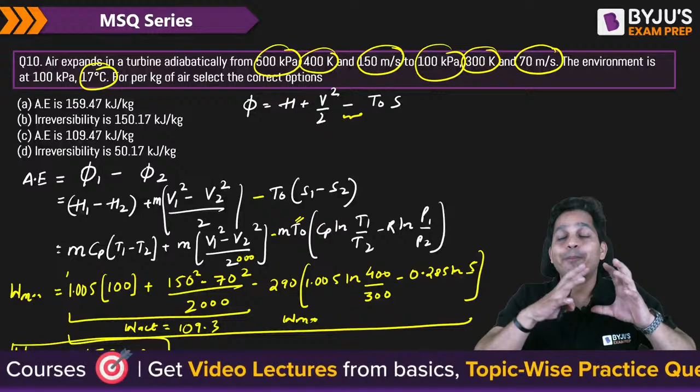So they are asking, this is your available energy, it is the maximum energy that you can obtain when you go from this condition to atmospheric condition, but that is not what you are doing, you are only going till here. So irreversibility is always maximum work that you can obtain if you go to atmospheric conditions minus actual that you are getting. So maximum is 159, actual is 109. The ratio, the difference is around 50. So this much work is getting lost because of irreversible losses.

Okay, clear? Guys, give me a thumbs up if it is clear. Quickly.